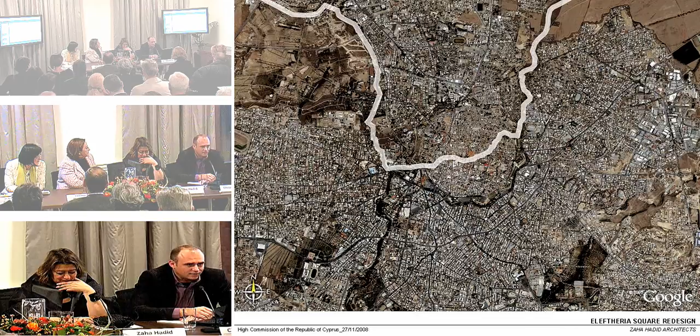I would like to start by explaining how we translated these methods, these ideas, into what we think is a viable design. And we start by looking at the site and the context.

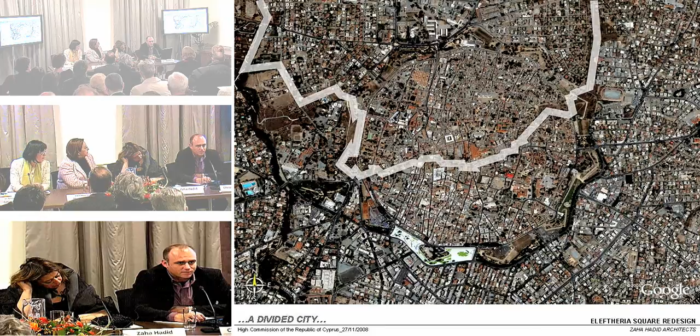At some point, one has to look at what is the city we are engaging with, and what is really unique about it. The two interesting things here are a Venetian wall, built in the 16th century, a very unique piece of architecture, large in scale, and also a kind of modernist constellation of housing that circulates this old medieval town.

So our concept, in engaging with this project, was how can we use all these elements to really find the things that are unique as a kind of Cypriot culture, but reinterpreted in a completely contemporary, modern, and forward-looking way. This project, in many ways, can be seen as a pilot project for a sequential transformation.

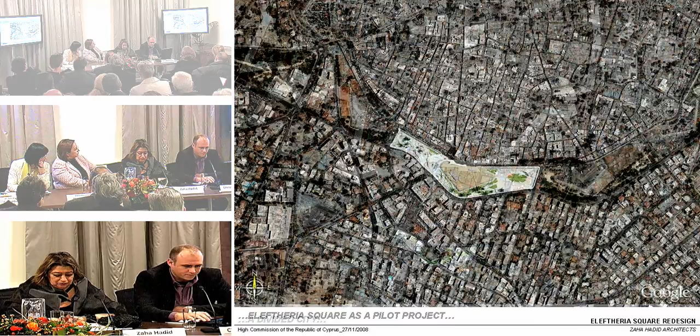of each one of the moat segments represented by the bastions that open up to each one of the cities of Cyprus, and through a kind of repetition from one to the other, an iteration and gradual transformation, hopefully we can come to the point where we see the city of Nicosia appearing again as a unified ring, a city with the facility of one circular central park, literally a central park that allows people to use it and look at it from all sides and all points of view.

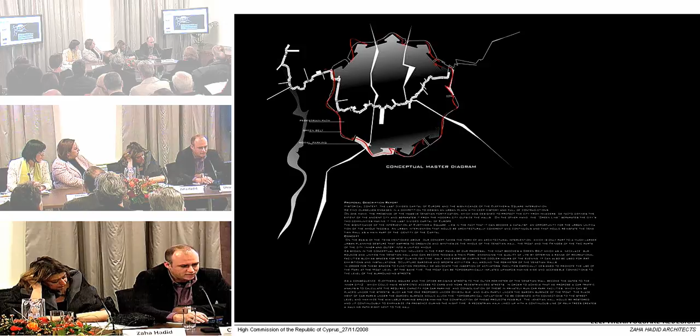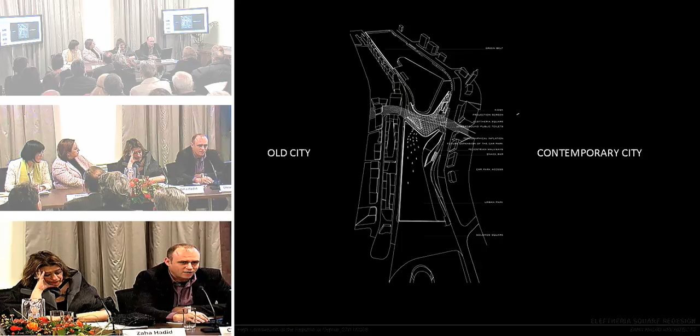So in doing that, we looked at the city, we looked at the kind of divisions, and we started thinking about what these things mean for us. Basically, the issue of division means a separation or an artificial distinction between elements that happens in many ways.

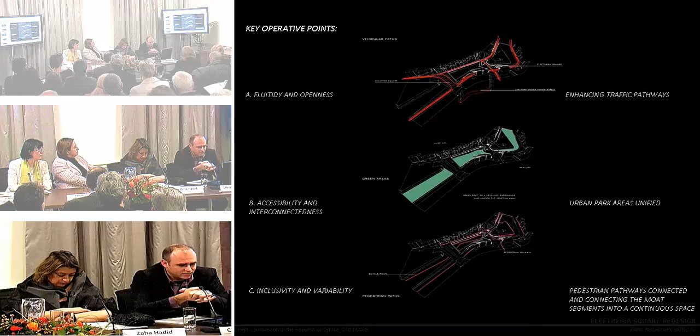So what we wanted to do is apply a set of rules, or operative points, whereby we try to reestablish fluidity and openness, accessibility and interconnectedness, inclusivity and variability. In other words, to make the elements of this place tease out everything that is unique about it.

Behind all these things, there is a notion and a faith that every single part of this planet has unique characteristics that are just waiting to be given form and expression. While this methodology has a simple way of working, it applies itself in many different unique ways in many different parts.

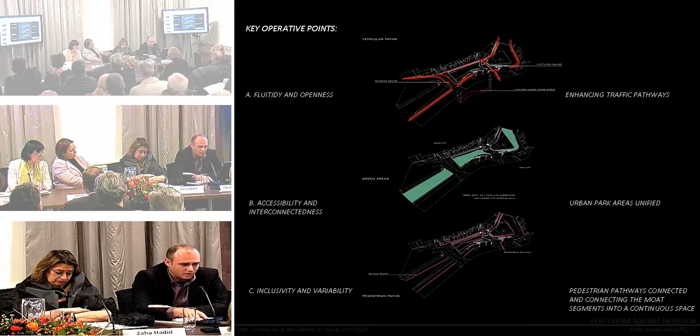So coming from Nicosia into the particular site, we're looking at how the moat is obstructed by trees that are old and not well taken care of, by car traffic, etc. The pedestrians do not circulate in the areas meant to be used as park, and generally this area is neglected because it's a dead end, a circulational dead end.

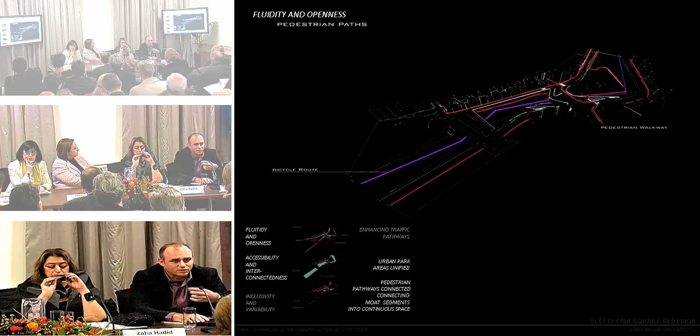So what we want to do is make those accessibility points visually accessible from a pedestrian point of view, so people see where they can go and can actually go where they want to go.

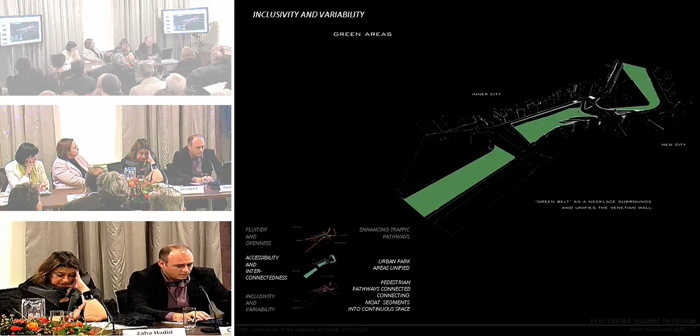This happens through our concept to reunify all the different parts of the moat, the green areas you see here that are currently separated by bridges, streets, etc., and to also enhance the fluidity of car traffic around, because this is how people move in cities today.

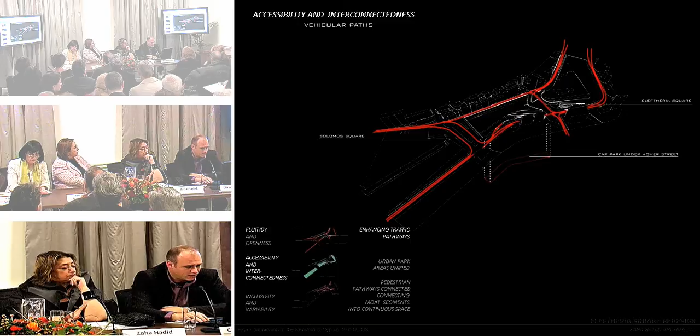They're very contemporary, dynamic cities, despite their traditional or old-looking imagery. In that sense, it's a highly dense traffic network, and these things need to be released so everybody can move in an easy and calm way.

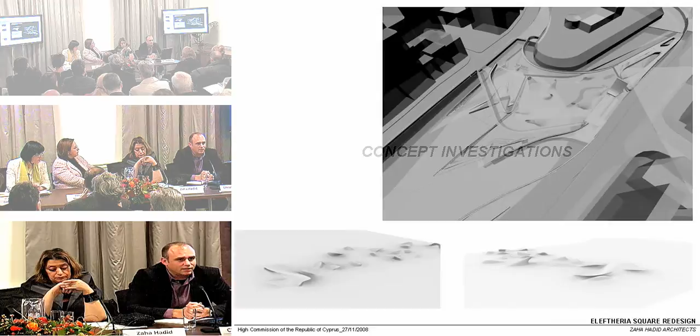So, in looking at this project a little more deeply, we started developing a series of structural concepts, implementations of structure and sculpting the elements that would eventually support this floating bridge, this dish that can hold all sorts of different events.

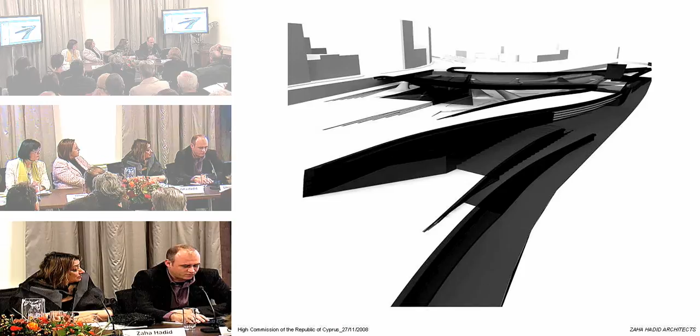These investigations took us to the point where we started looking at the space of the bridge as a vital space, as a new room, a space that becomes both a transient space but also a location in itself. At the moment, for those who haven't been on site, this area is completely blocked, and very recently, through archaeological surveys, we've discovered a new part of the existing Venetian wall.

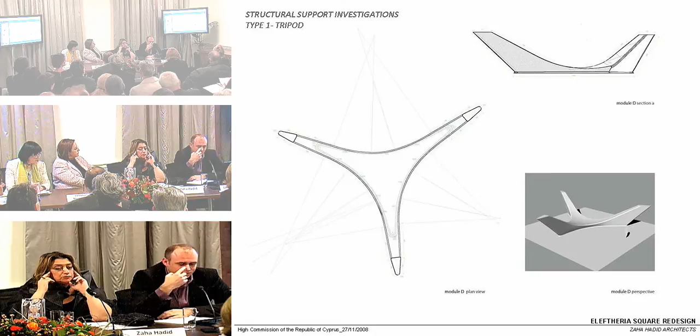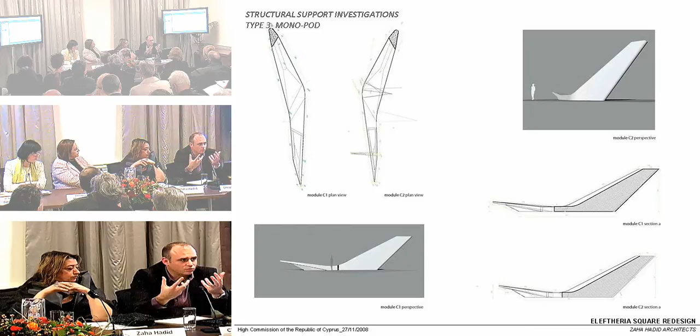Basically, these supports are now taking the form of a family of elements that are tripods, such as the one you see in this image, bipod supports, and singular supports. We're creating a family of supporting elements below that, on one hand, give us the flexibility to move them around like a chess game, and on the other hand, always have a continuous structuring of the bridge.

Okay. The second thing is that we are looking into the landscape and how to continue and create a pattern that is continuous, variable, and changing from one side to the other.

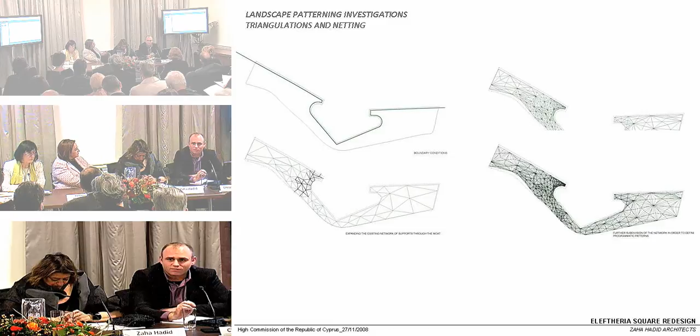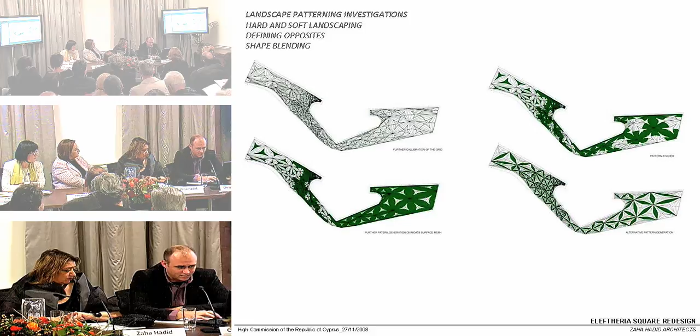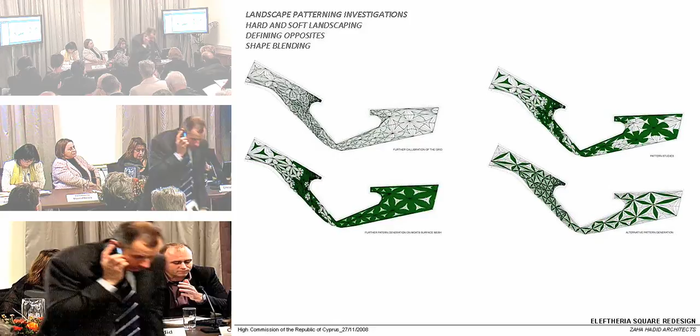This is perhaps one of the most interesting parts of the site, especially looking at options such as this, which later became the final solution, where we're looking at shape blending. In other words, we start with a gradient on one side, and by the time we come to the other end of this park, the shape essentially turns inside out.

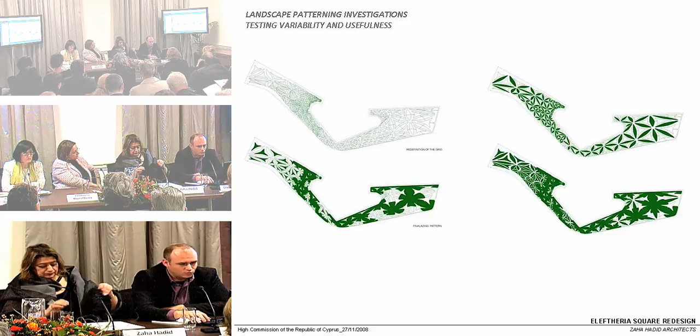So we go from black to white, from a star shape to a vine leaf shape, or a kind of different shape. But what is important here is that one sits inside the other, so the transition becomes extremely smooth, almost inconspicuous.

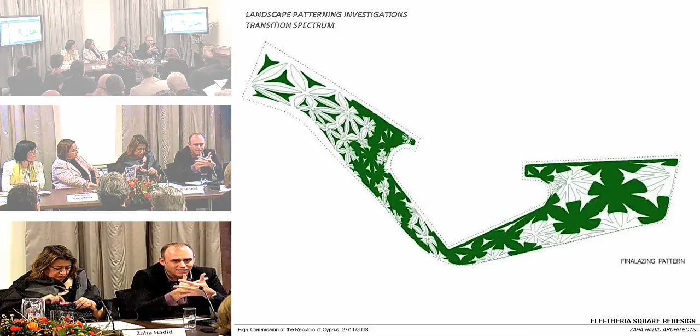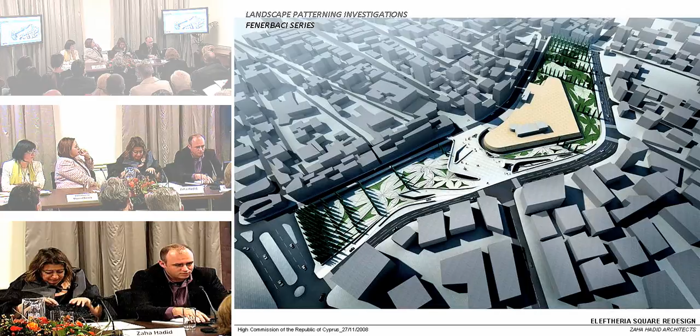These are three-dimensional manifestations of how this patterning can take place, giving us the opportunity to structure the hard landscape versus the soft landscape on this field. Looking into plantation studies, looking at Fibonacci series, mathematical ways to implement this.

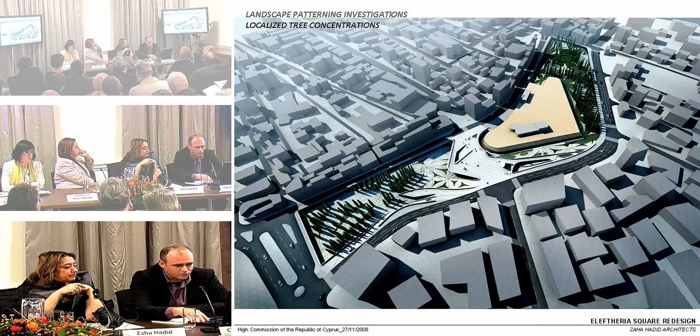Then more localized plantation forms, more stratified forms. In the end, we come to a solution where we look at each one of these nucleuses and try to articulate them in a different way every time, implementing in each a sense of uniqueness of both function, form, purpose and material.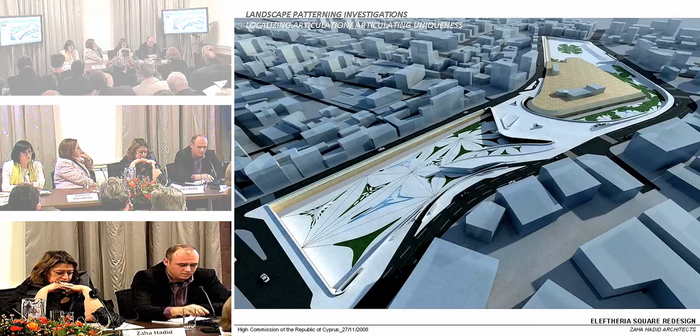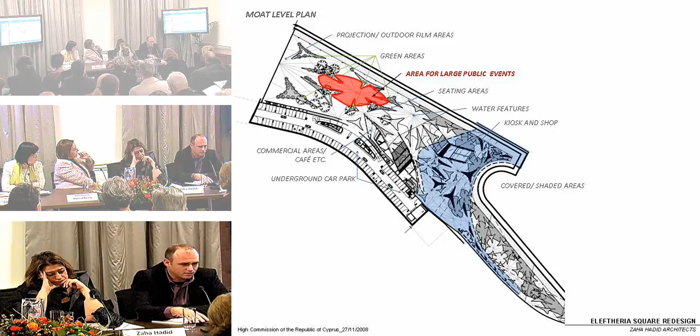Moving through these, we're also looking into different ways to show the park, though we always show it empty of any temporary events. There is a myriad of ways these can be implemented or used by the municipality and the people. This is one view of how this plantation can take form.

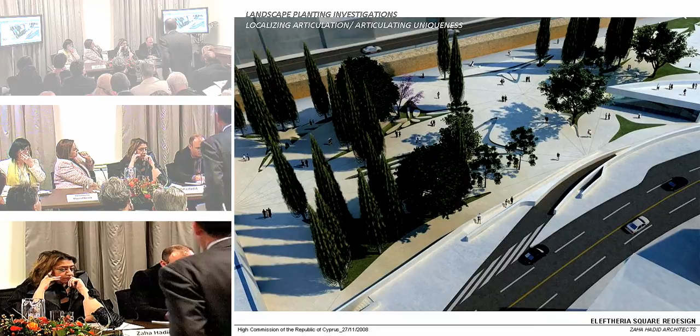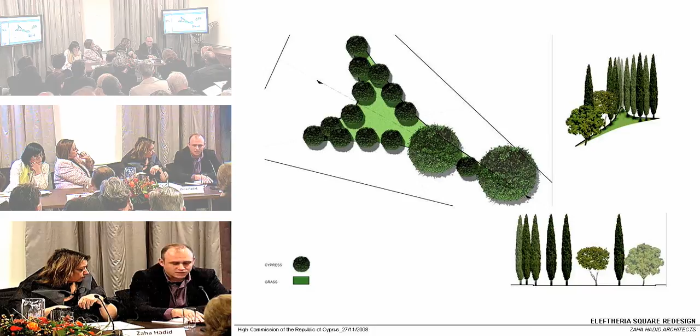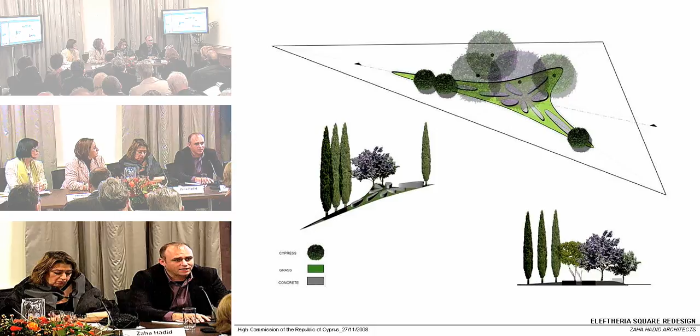The designs for each nucleus use a combination of different tree types, floor materials whether grass or concrete, and sculpted seating elements. In all of these things, we try to include as many different user types as possible. We don't want a park for a specific user group, but one that can take 10, 15, 20 different types of users.

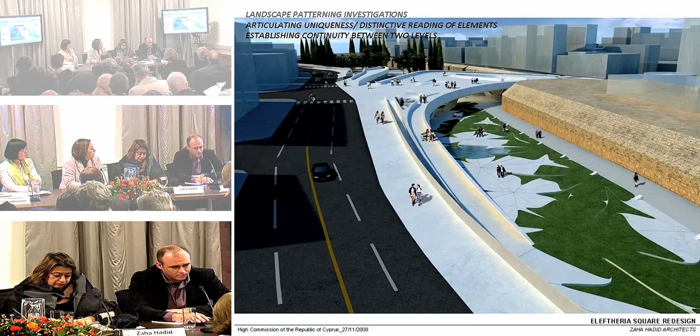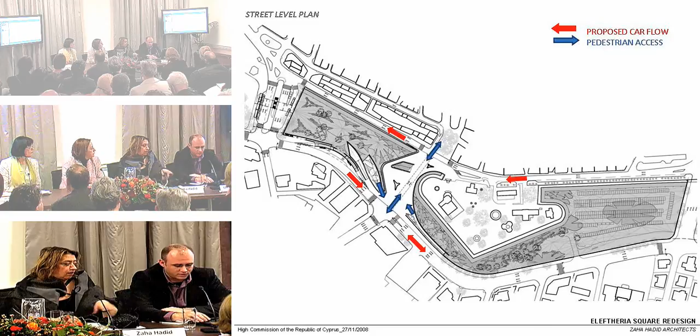Proposed vehicular circulation versus pedestrian accessibility now. There are additional ways of being able to reach the two levels of the park, and something that was quite important when we spoke to people there was how do we create this kind of coexistence between the ancient monument and a contemporary piece of architecture, and how to bring these two things together.

What's interesting is that each of these elements will read in its own right—none of their presence or initial intent will ever be compromised. The wall will still read as a wall. The continuity of the curtain wall will be maintained and even further made visible by the excavations and the openness we are instigating now.

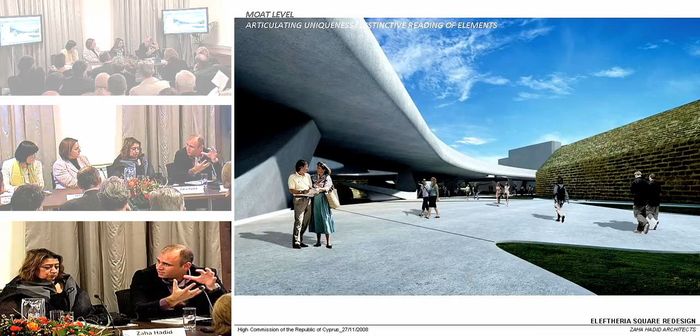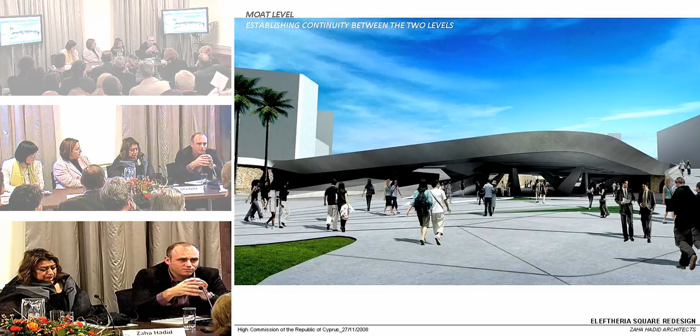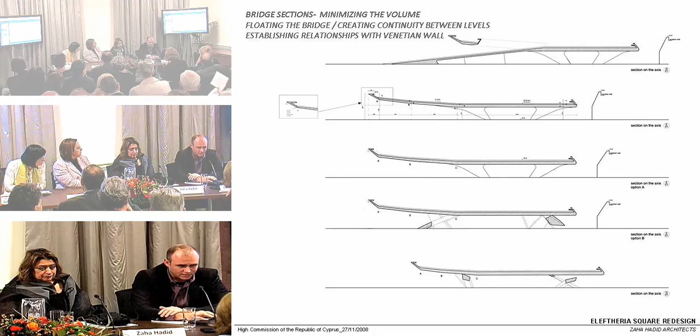Sections of the project looking at the existing bastion of the wall and how the bridge comes next to it.

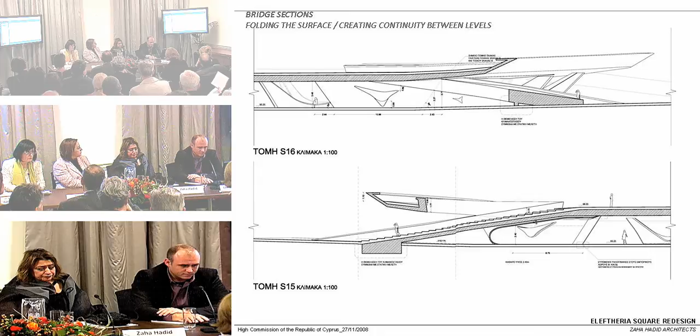There's a continuous sculpting of every element of this new object to make it all look monolithic and as simple as possible. The aim is to provide an infrastructure, a background for all the city activities that have always happened on Eleftheria Square to continue in the same way, and maybe in an even better facilitated way.

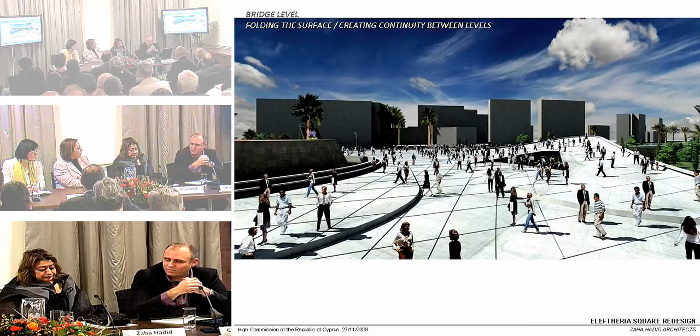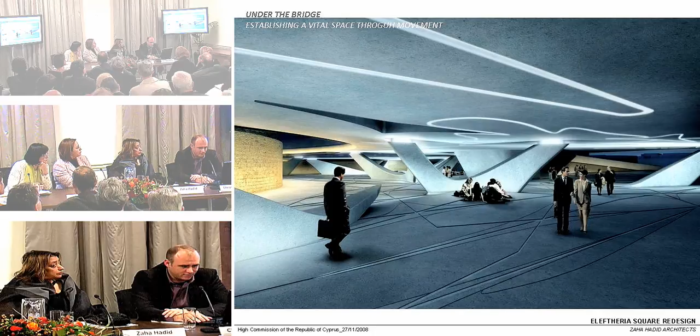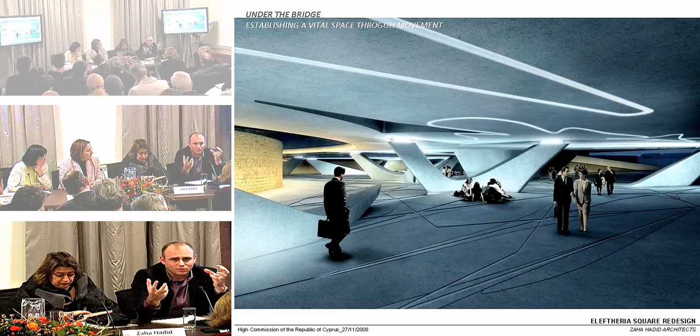The space under the bridge—you should talk about it as a kind of public room. I think it's important because the climate necessitates some sort of coolness in how people use the space. By opening up the moat again and connecting one side to the other, it gives us the opportunity to have a rather large area, about 1,500 square meters, of covered outdoor space.

It's an implied room, if you like, and in there people can have lunch breaks or use it to sit. It can also be a space where information about the city of Nicosia and its events can be advertised in a variety of ways.

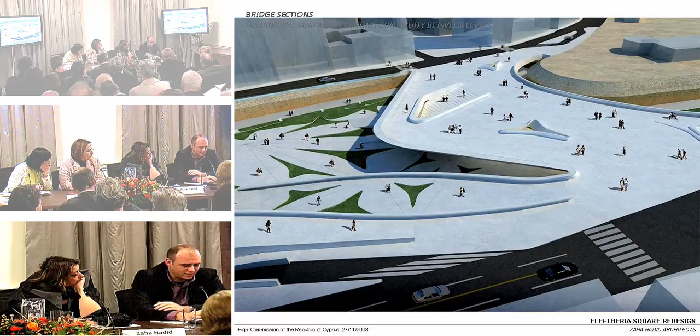This kind of maximization of access between the bottom part of the park, the moat, and the top part of the park means there is one interconnected, continuous surface that makes movement upstairs and downstairs extremely easy.

These are our latest views of the whole complex, and some additional night views. At night, perhaps this can be a space in the summer or on full moon nights where people can actually use it in all sorts of ways for different events.

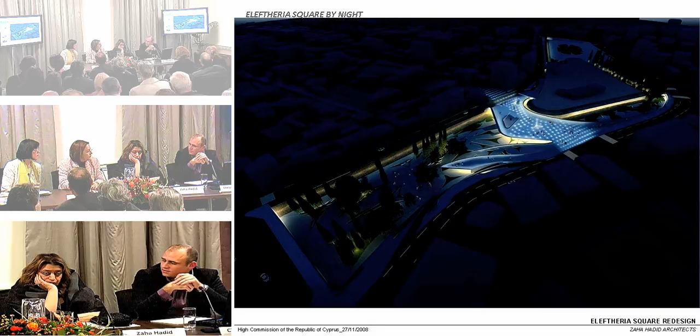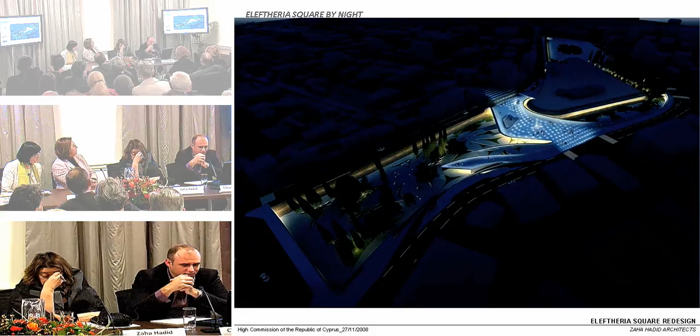Like night projections, like something the mayor instigated, which was night walks through the city. So maybe this becomes one more stop in this kind of walk through the city. At the same time, this becomes a kind of contemporary landmark for Nicosia.